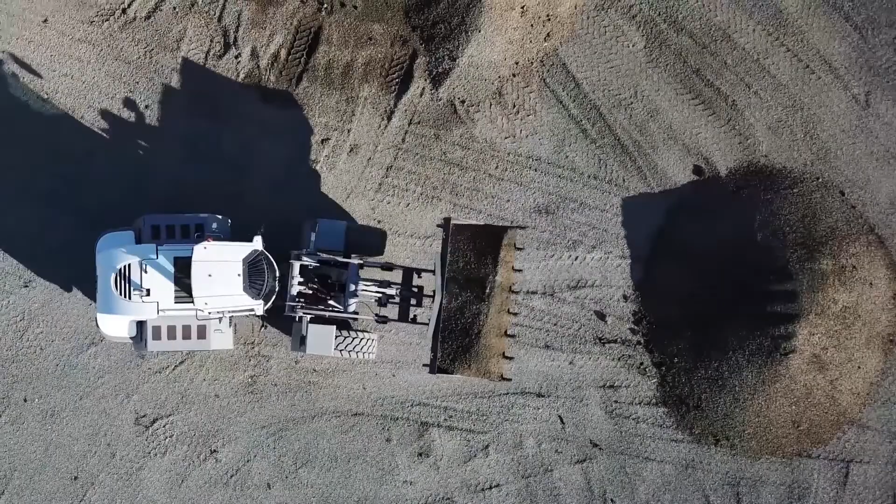Hello, in this video we will be covering multi-axis steering.

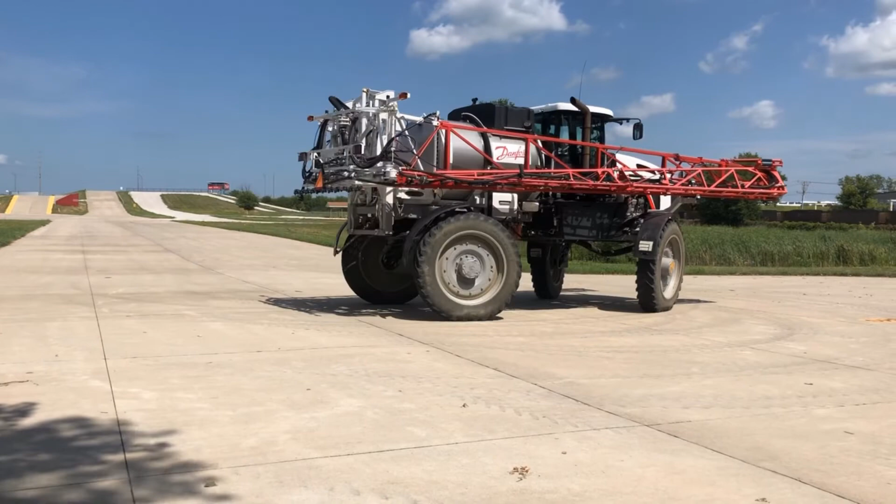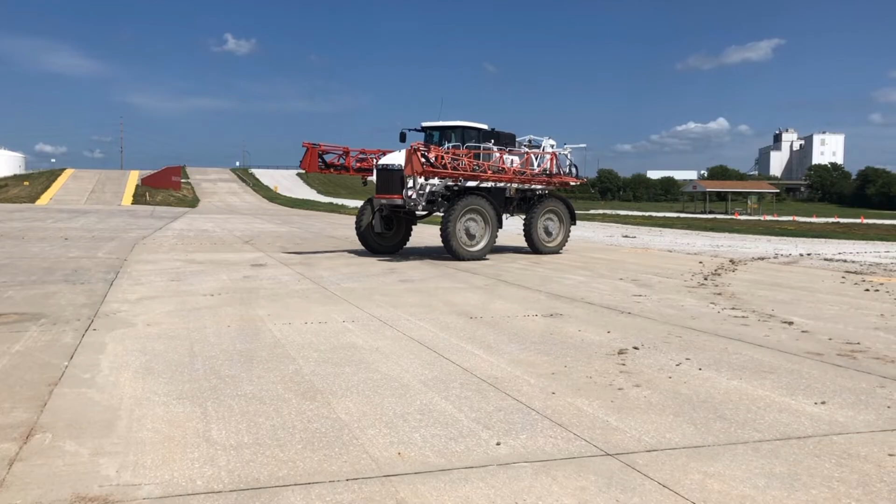Multi-axis steering can be used for applications where more maneuverability is desired, such as when machines are used in tight spaces. This can be beneficial in material handling applications to reduce the amount of area needed to maneuver the machine. Multi-axis steering provides four main steering modes: traditional or two-wheel steer, four-wheel or all-wheel steer, implement steer, and crab steer.

Multi-axis uses a virtual axis to set what point the machine is turning around. This is used to determine what steering mode the machine is in. For example, in two-wheel steer, the axis is in line with the rear axle, so the front wheels will turn while the back stay in the same position.

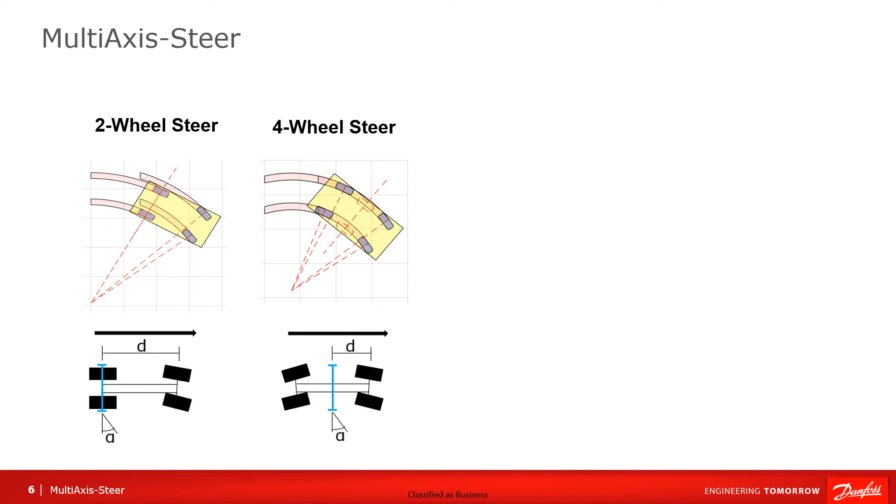In four-wheel steer, the virtual axis will be shifted to between the front and rear wheels. This will result in all four wheels turning at the same time and following the same path while driving. In implement steer, the axis will be positioned behind the vehicle. This allows for wide turns when pulling an implement.

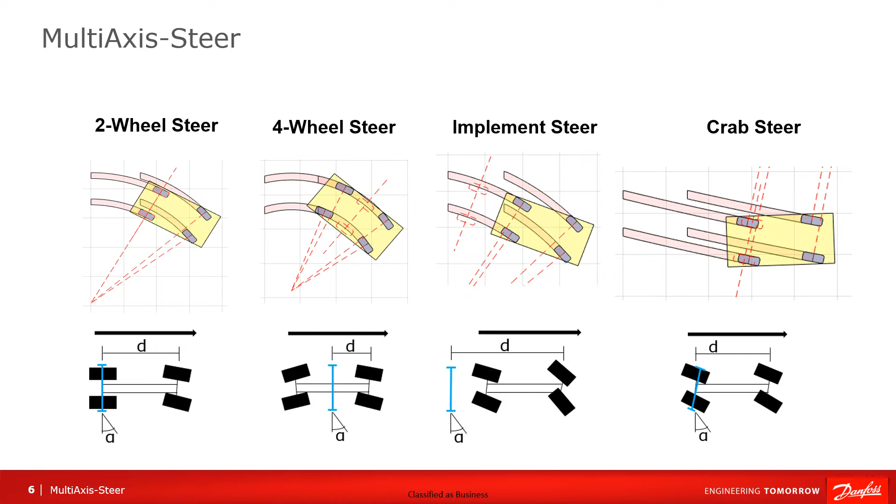In crab steer, the angle of the axis is changed, so the rear wheels will follow that angle. This can be set at a specific angle or can mirror the angle of the front wheels.

Multi-axis steering can be used with an OSPE, EHI, EHI and OSP, or just an OSP on the front, with an EHI for the rear axle. This allows multi-axis steering to be integrated into existing steering systems if the machine is compatible.

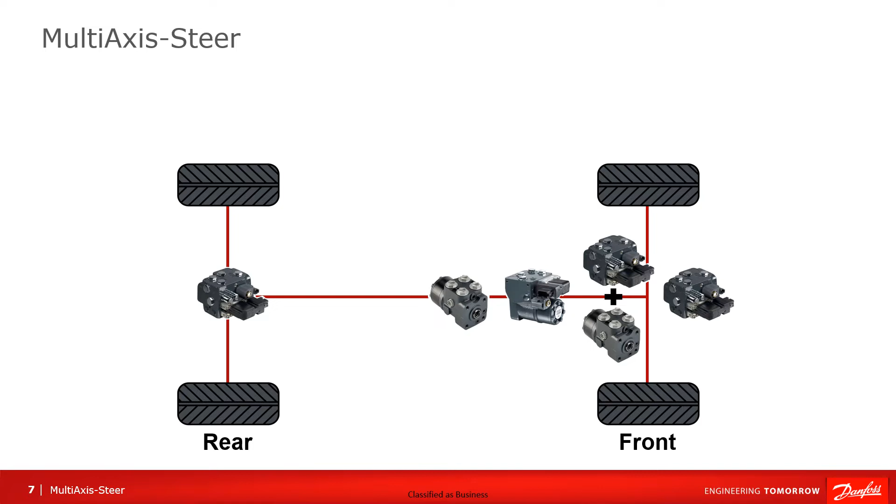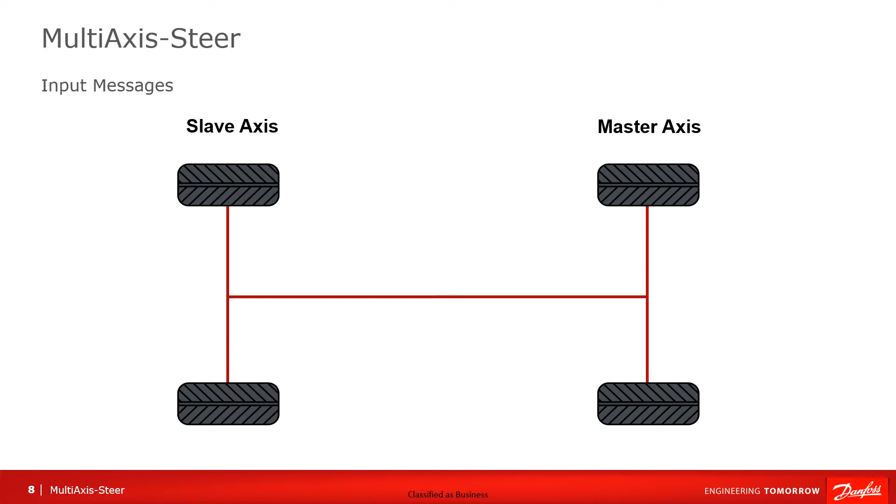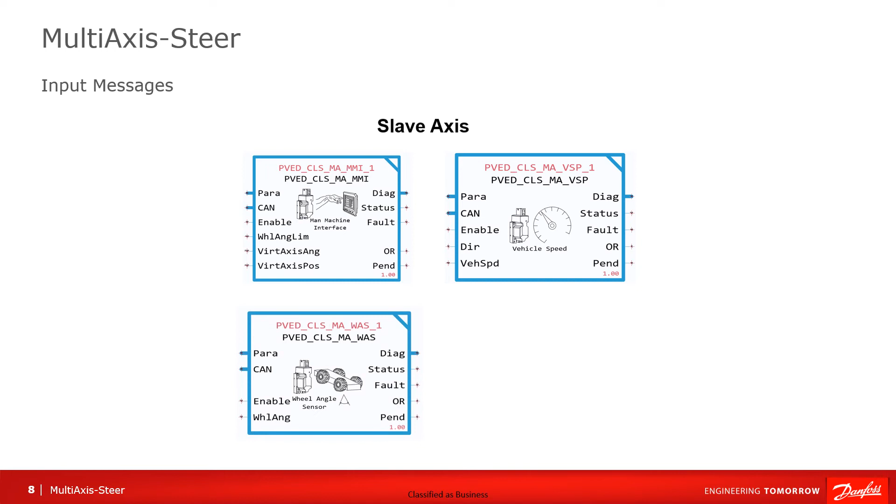Multi-axis will require inputs such as a vehicle speed sensor, MMI, and a wheel angle sensor. The input messages that must be received over CAN are different for the slave axis. The slave axis must receive the multi-axis MMI, vehicle speed, which is the same as the standard vehicle speed, slave WAS, which can be analog or CAN, and the master WAS message.

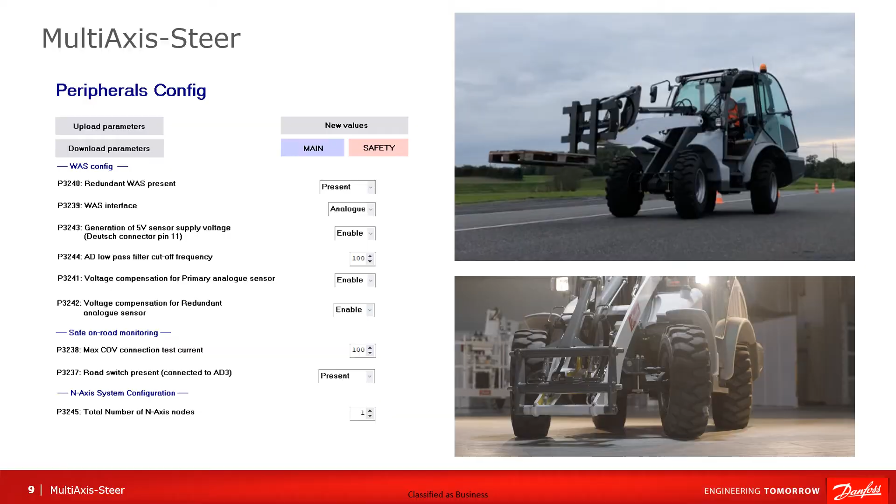Once the hydraulics and wiring are completed, Service Tool can be used to set parameters to match the configuration and desired capabilities of the machine. Multi-axis uses its own Service Tool file, located in the multi-axis firmware package. The main parameter pages to be aware of are the peripherals and N-Axis config pages.

Multi-axis is based on the concept of a master and a slave axis. There can only be one master axis with any number of slave axes. In the peripherals config page, the number of N-Axis nodes should be equal to the number of slave axes. The majority of multi-axis machines will only use one node.

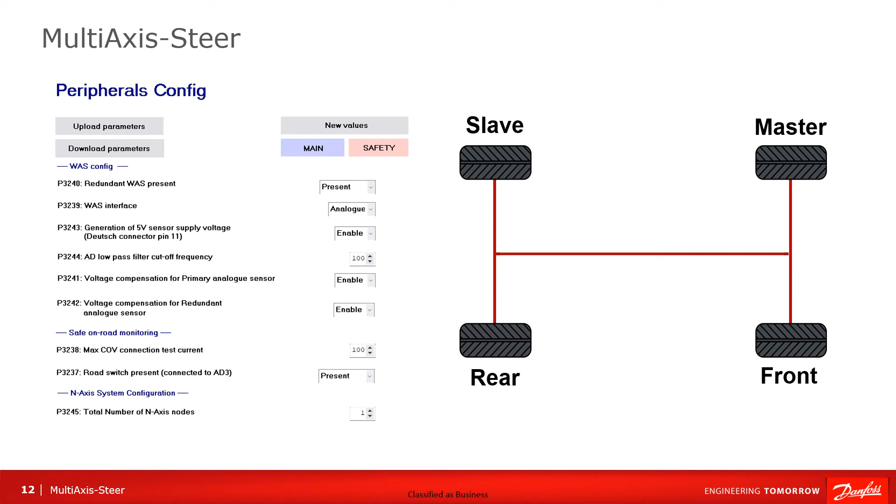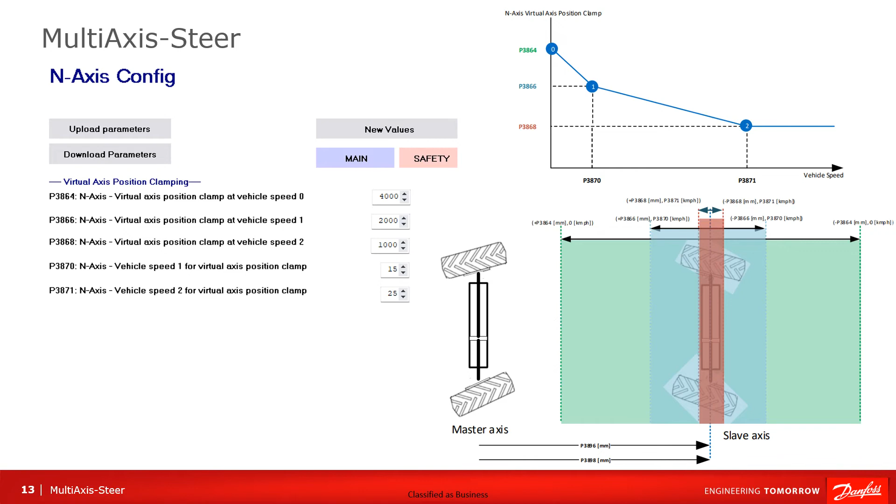The N-Axis config page controls the position and angle, clamping and ramping, as well as the closed loop gain, set point clamp, and wheel angle limit. The N-Axis position clamping determines how far the virtual axis can move from the original axis at a given vehicle speed, while angle clamping determines what angle can be used at different speeds.

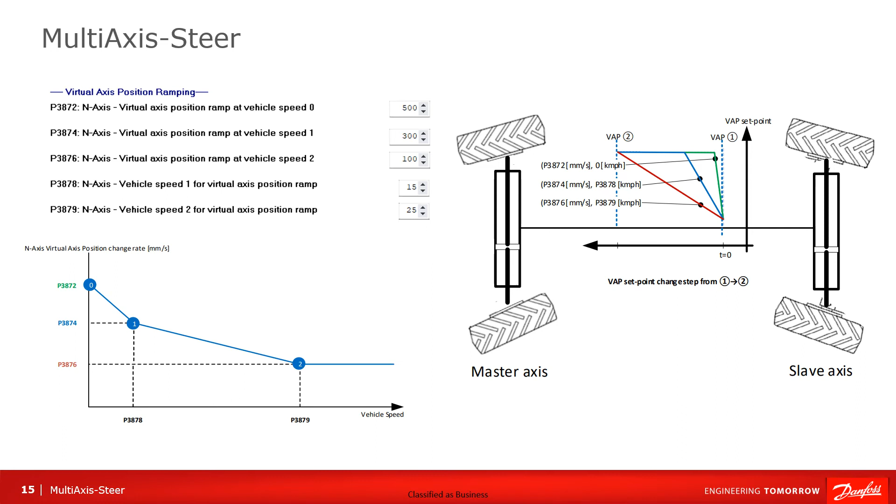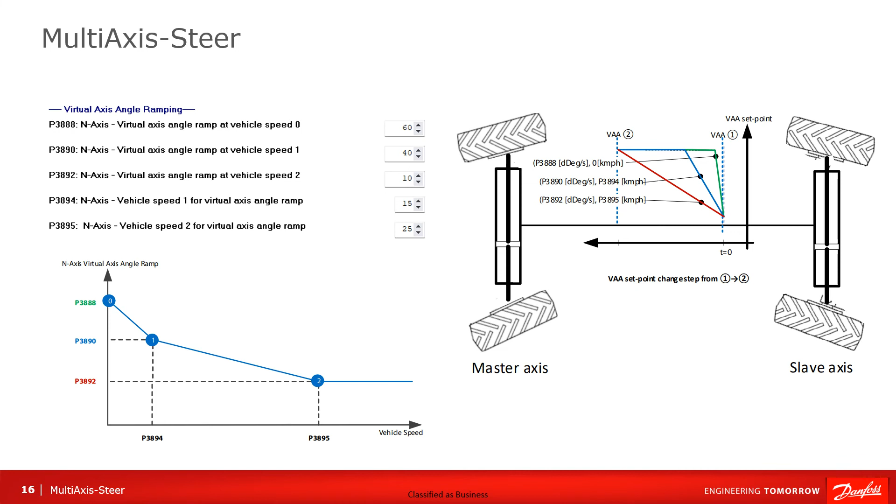The N-Axis position ramping determines how fast the virtual axis can move at a given speed, while the angle ramping determines how fast the angle can change at a given speed. These ramps apply to the position and angle change by both the user input and the transition to the on-road state. The closed loop gain will determine the gain of the rear wheels at different speeds.

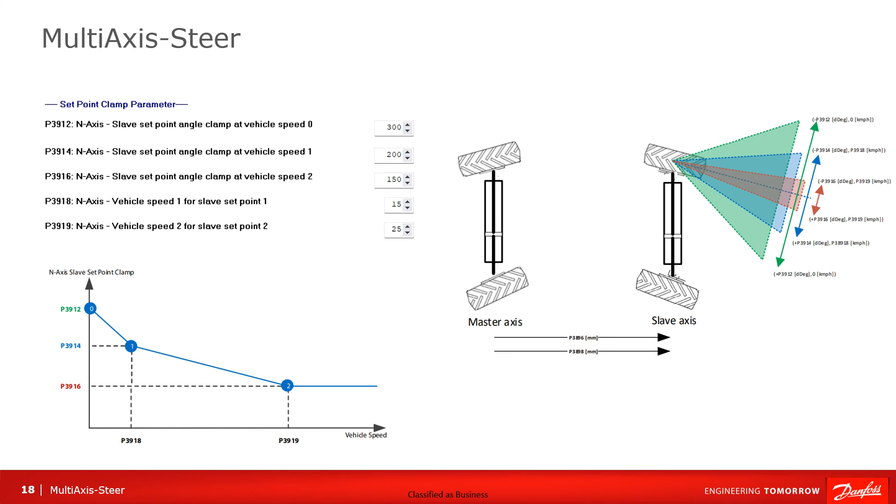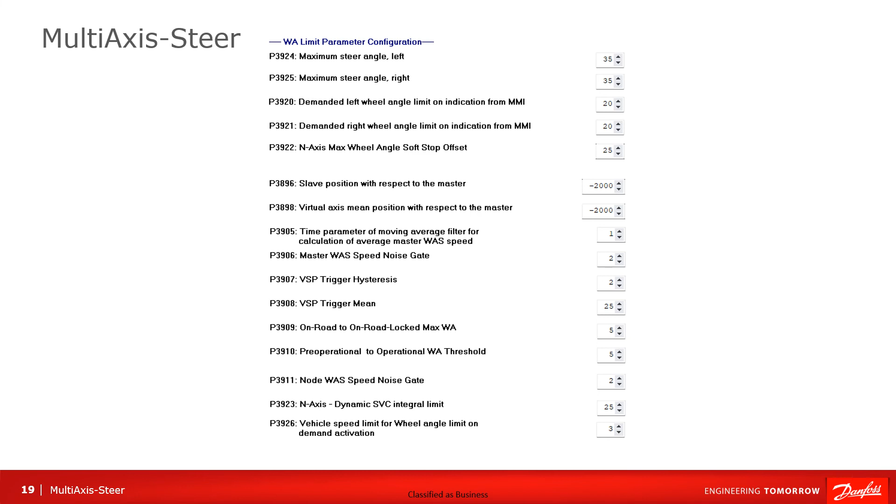The set point clamp parameters make it possible for a wider wheel angle at lower speeds while limiting the range at higher speeds. The maximum steer angle is used to set the maximum wheel angle of the slave axis. This is based on the geometry of the machine. The demanded wheel angle limit parameters set a max wheel angle for the slave axis when requested by the MMI. This is not used for the sharpest possible turning angle.

For more information on multi-axis steering, please reference the multi-axis technical information as well as other multi-axis videos.